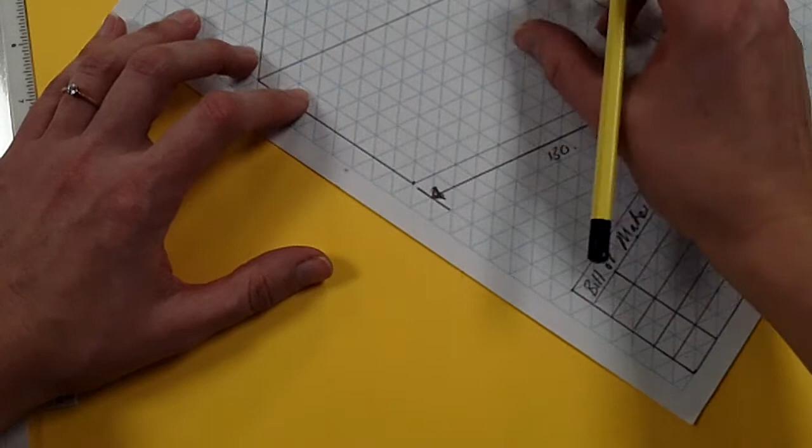So this is just a nice quick recap on what was taught last lesson. Now, the same shapes will be used in this one. It's just going to be the reverse way round. I'm going to start by first of all adding in the centerpiece here. This is where your face would go into our Google Cardboard. So once again, 10 mil, 10 mil. Then taking a curve of 1, 2, 3 and up to here. So I'm going to curve that.

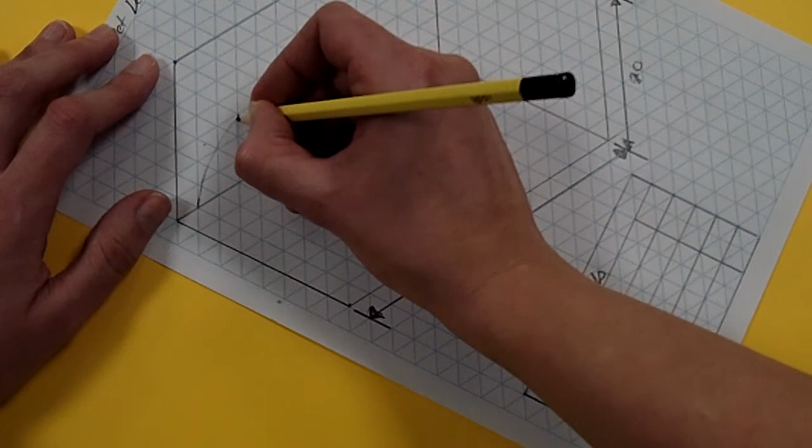If you notice, when I do my freehand curves, I press on lightly, and I press on harder when I'm ready to make a more definite line. Again over here, curving it up, and then I'll be connecting that with a nice straight line to add in the curved feature of the box. And again connecting that up, nice curve over there, and the same over here. Inside the box itself, I'll need to remove that line and add in some of my other hidden features as well.

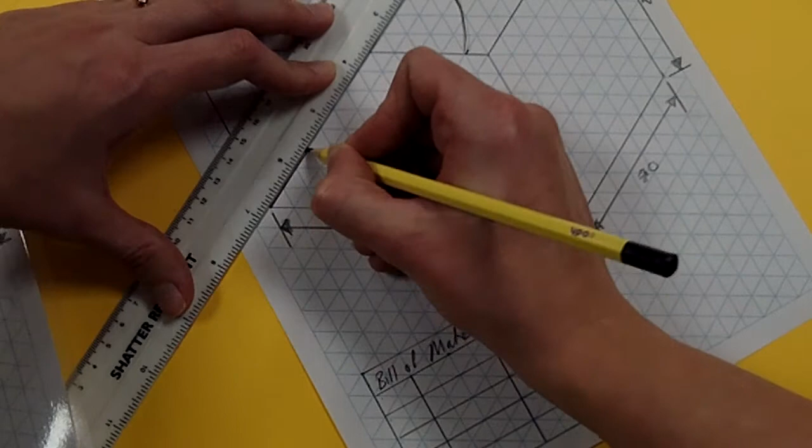I'm now going to go into the inside of the Google Cardboard, into the shell. So these are my solid lines first. I'm not going to go for any hidden lines as of yet. I'm going to take this over, so it goes over onto there. 1, 2, 3, 4. And again over here, 1, 2, 3. So I should have the gap in the middle as well that I'm going to be adding in for the center piece.

And just check over here. 1, 2, 3, 4, 5, 6. 1, 2, 3, 4, 5. So what I might do is leave that as 5 there, but connect the 2 pieces in later for the nose. The nose, if that's starting there and starting there, the central point is over here. I'm going to arch that up, freehand it, and arch that round and freehand that in.

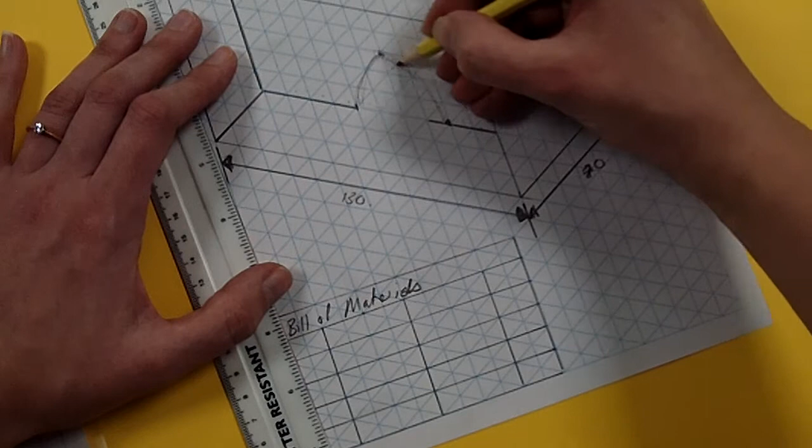And then when adding in your circles, you can trace these if you wish once you've drawn one, but as long as you've got your circle shape in there, that is great. And again, I can take that right up on there, and the distance from there should be the same, and take that in over on there.

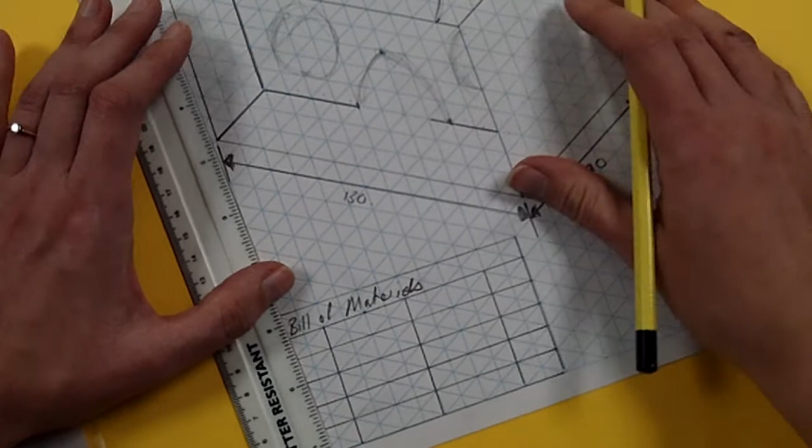Lovely. Right then, next bit, we've got a couple of hidden lines up here. Remember from last lesson, hidden lines are going to be shown with a dotted line. And also, because this is a 3D shape inside there, I'm going to add some hidden lines over there that will then connect with this. This is also a hidden line because it's concealed by the frame of the box.

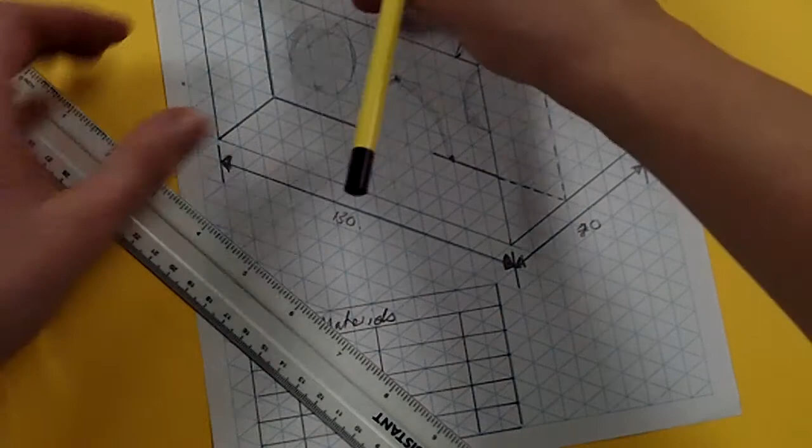Now don't forget to rub out some of the lines that you started off with your crating. So I'm going to take away that line, and hopefully you now can see the inside now of this shape. Solid your lines over, make sure they're nice and clear.

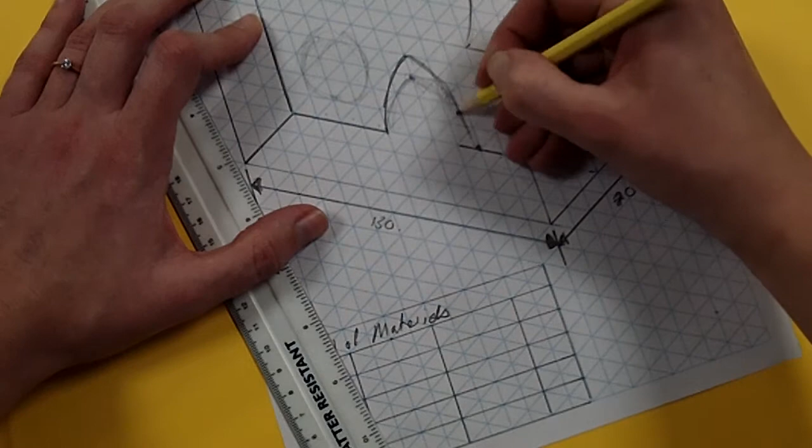I might bring the height of this up to about here instead, now that I'm seeing the overall view of the product. And again, curving it for 2 back round that side, and again I can rub out any errors that I've got on here later on.

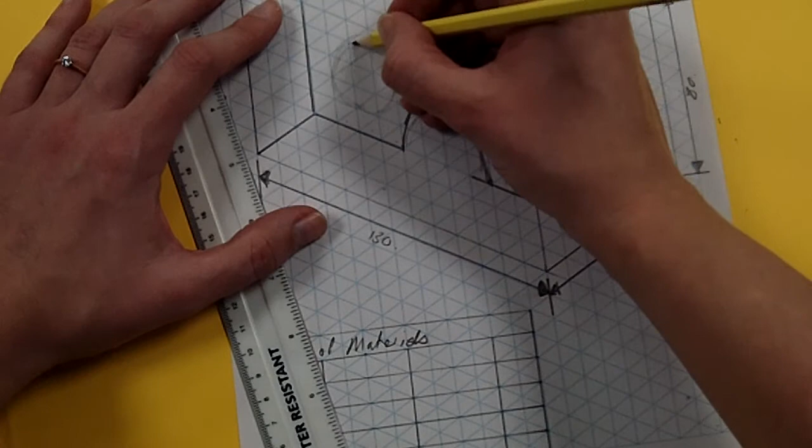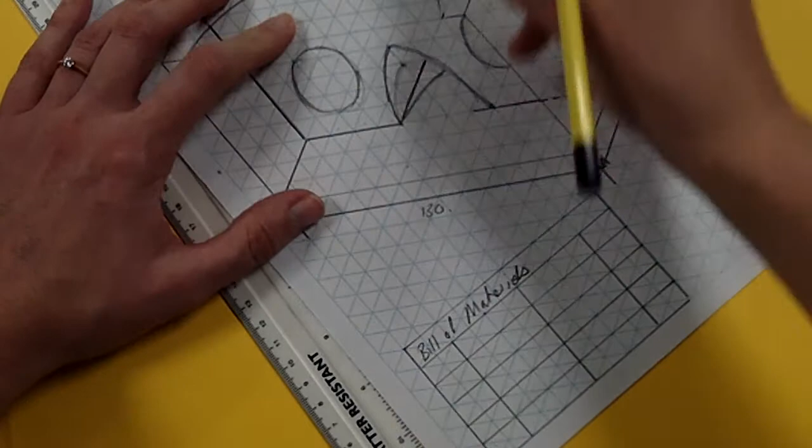So you've got the entrance into the actual Google Cardboard as you put your face in. I'm going to take that round to there because that's the inside of the shape, and there's also a slight curve if you look at the Google Cardboard itself, and again I can rub out some of those lines that I don't need to add on there.

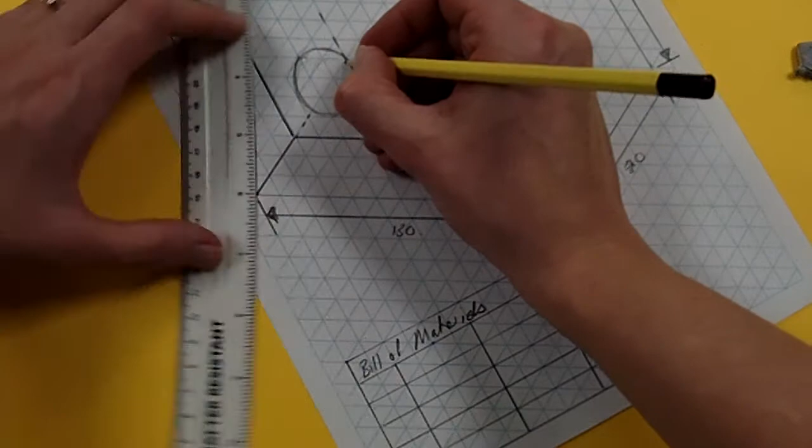Now again, it's a 3D shape, so at the top here now we need to start adding in some of my dotted lines over here and dotted lines through. Because this is a lens, I'd like this to be more of a solid line, as you can see through it. So it's a solid line through the lens, which is transparent. And again, dotted lines to the side and down.

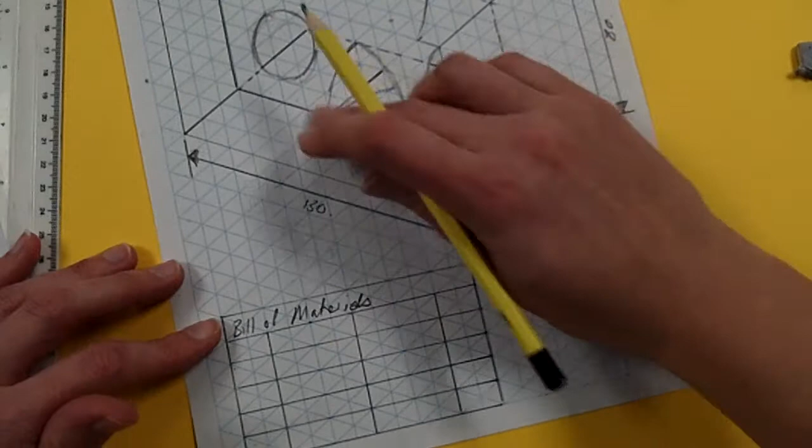Solid line there through the eyeglass, and then solid, and it should meet up with the vertices of your cuboid from earlier on. So there's our hidden and some of our exposed lines. We've got a solid line down there, we've got the nose part and the two eyeglasses, the piece at the top on there as well.

Right then, next bit, we're going to add in the flap at the top. Now we looked at the flap last lesson, let's add it in again. So again, we want a curved feature coming out for 2, curve it at the end, and then I'm going to bring that down and round here. It will mean that this line over here is going to be dotted.

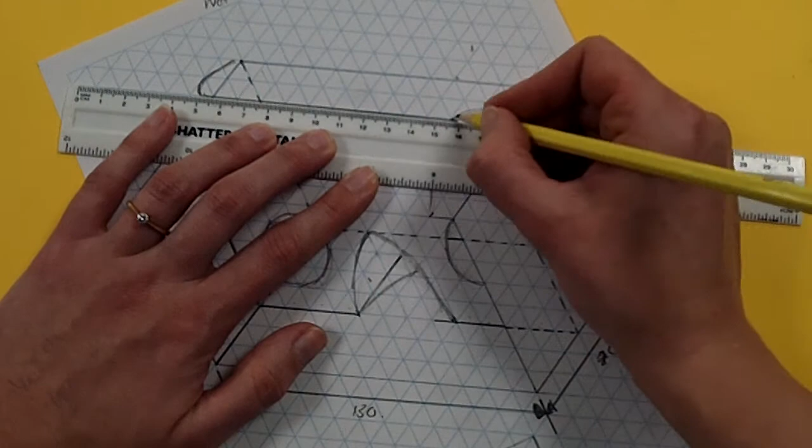I'm going to take that down, all the way down on there, curve that feature up, and then curve it round for that piece on there, and that's the top of our flap. And that means that that line there, as it's now concealed by the flap, is going to be a hidden line as well. Right then, so let's just have a check on here.

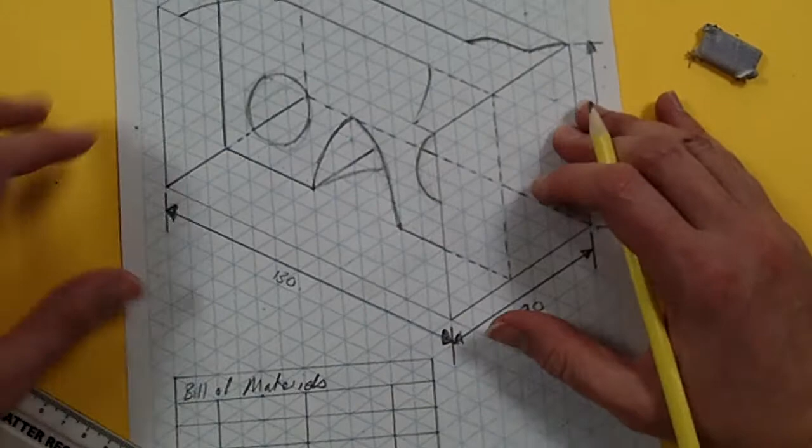I've got the 2 circles for the lenses, the biconvex lenses. We've got this frame here now that I can go over a little bit harder now for the nose, about that section there so you can see it clearly. And then the last thing, folks, that I'll need to do on this is I will need to label up my pieces that I use on here.

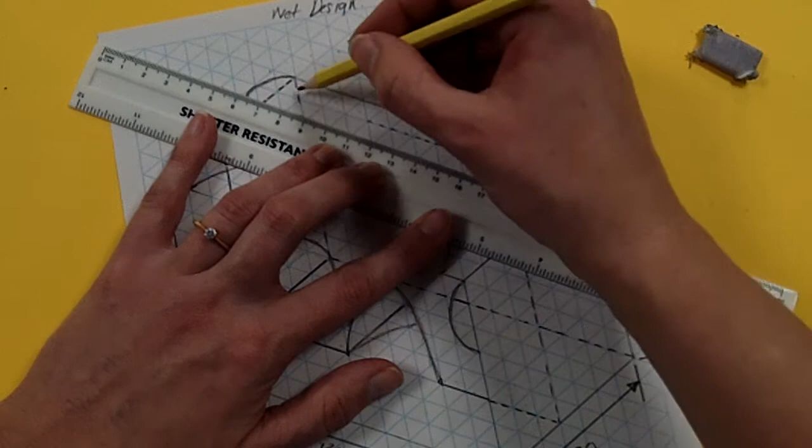So I'm going to start off by saying that A over here is the flap. I'm going to say that the section over here, which I'm just going to pen in now, is going to be the Velcro. Again, because it's concealed, I'm going to do it as a dotted line. Make sure it's even on both sides. 2, 3, 4, 1, 2, 3, 4, which it is. Dotted line again. And I can get that labelled up now as B.

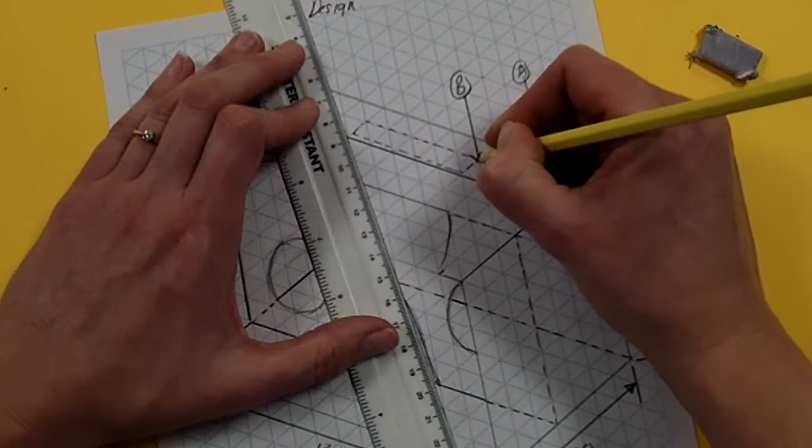And then start to connect it. Remember, when you're labelling, you need your lines nice and straight. And label up B, which is our Velcro, which I'm just going to point out on there. Label up the lenses, which are down here, but I probably want to label up this one over here. And again, have that as a solid arrow.

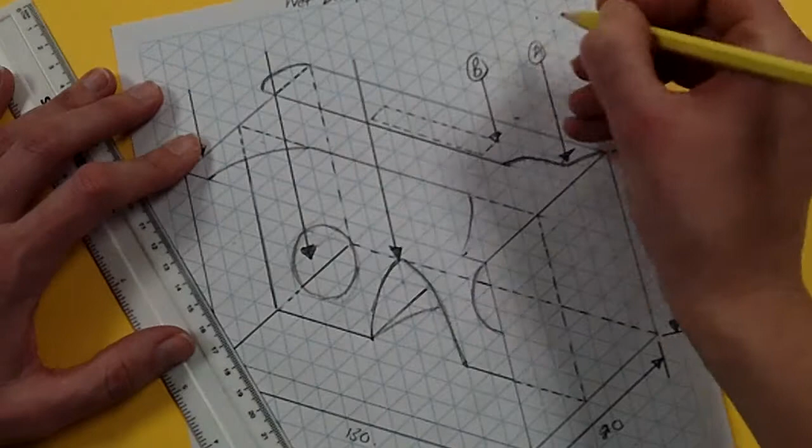Label up this, which is the centre for where the nose goes in, again with a solid arrow. And of course label up the cardboard as well, just for the material, and again you can fill that in the bill of materials later on. A, B, try and get in alphabetical order, C, D and E. And there concludes our drawing.

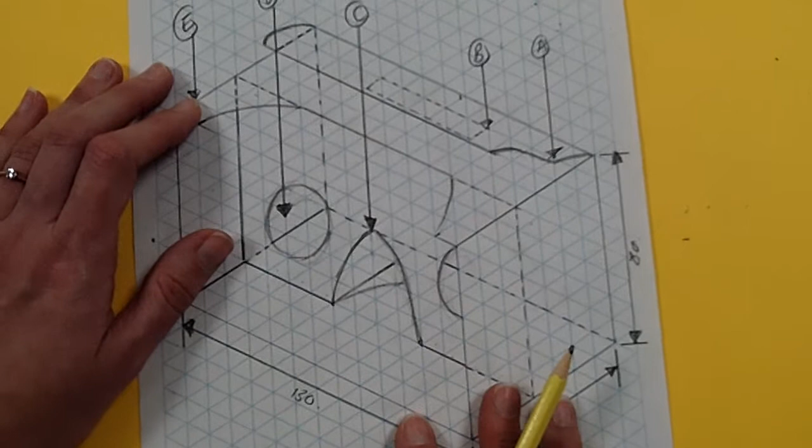The last step for this would be to add in the final piece, which is the bill of materials. Again, listing A, B, C, D, E on there, saying what the actual product is, what it's made from, and the quantity that you require. And that concludes your second tutorial on drawing your second view of your Google Cardboard.